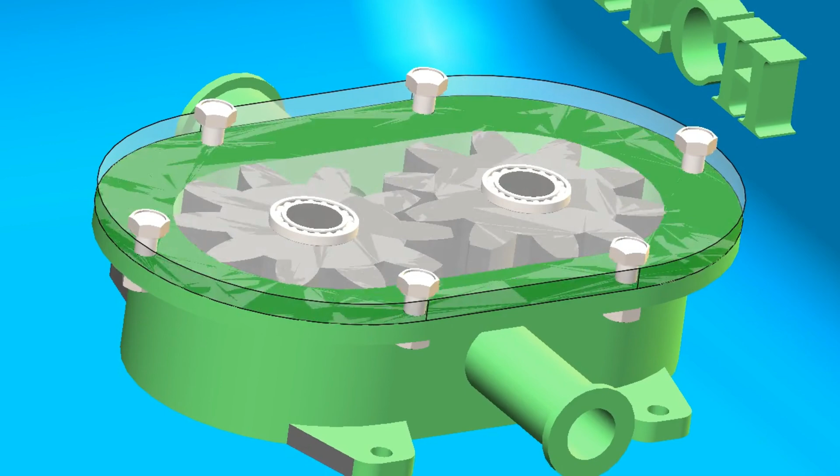What is an external gear pump? An external gear pump is a type of positive displacement pump that moves fluids by trapping them between rotating gears and the pump casing. Its simple design consists of two gears: the driving gear connected to a motor and a driven gear which mesh together within a housing.

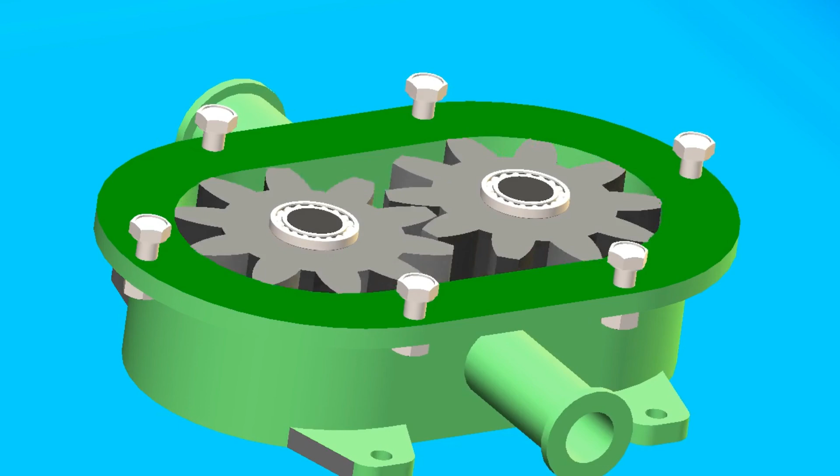As the gears rotate, they create a vacuum at the inlet side, drawing fluid into the pump chamber. The fluid is then carried around the gears and forced out through the discharge port. Known for their efficiency, reliability, and versatility, external gear pumps are used in hydraulic systems, lubrication systems, fuel transfer, and chemical processing, among others.

How does an external gear pump work? External gear pumps work on the principle of positive displacement, meaning they deliver a fixed amount of fluid for each revolution of the gears. Here's a more detailed explanation of how they work. External gear pumps consist of two gears, a driving gear, connected to the motor, and a driven gear. These gears have precise teeth that mesh together and rotate within a close-fitting housing or casing.

As the gears rotate, they create a low-pressure area at the inlet side of the pump. This low pressure causes fluid to be drawn into the pump chamber from the fluid reservoir or inlet port. As the gears continue to rotate, the fluid is carried around the outer periphery of the gears. The fluid is trapped between the gear teeth and the pump casing, preventing it from flowing back to the inlet side. As the gears rotate further, the trapped fluid is carried to the discharge side of the pump.

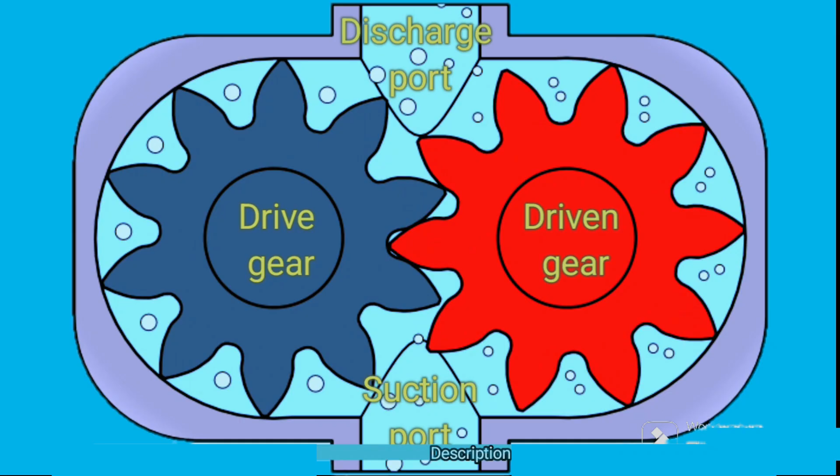The decreasing volume between the gear teeth and the casing forces the fluid out of the pump through the discharge port. This process repeats with each revolution of the gears, delivering a consistent flow of fluid. The flow rate can be controlled by adjusting the speed of the motor driving the pump or by changing the size of the gears. External gear pumps rely on tight clearances between the gears and the pump casing to minimize internal leakage.

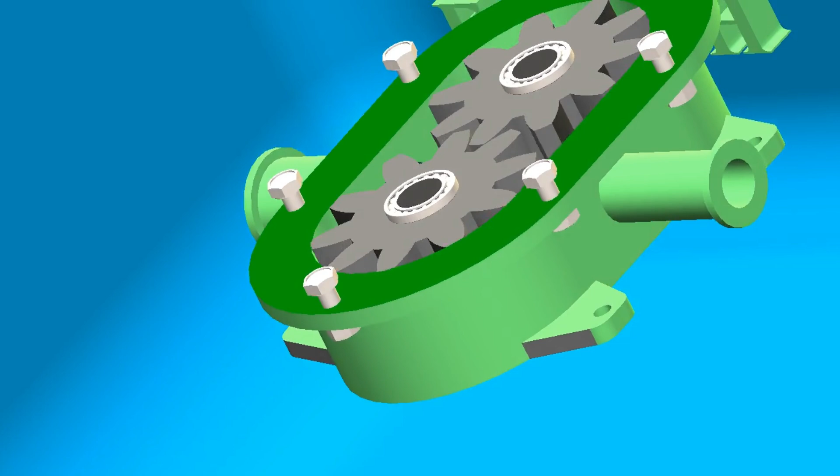Seals are also used to prevent fluid from leaking out of the pump and to maintain pressure within the system. External gear pumps are used in a wide range of applications where precise fluid delivery is required, such as hydraulic systems, lubrication systems, fuel transfer, and chemical processing.

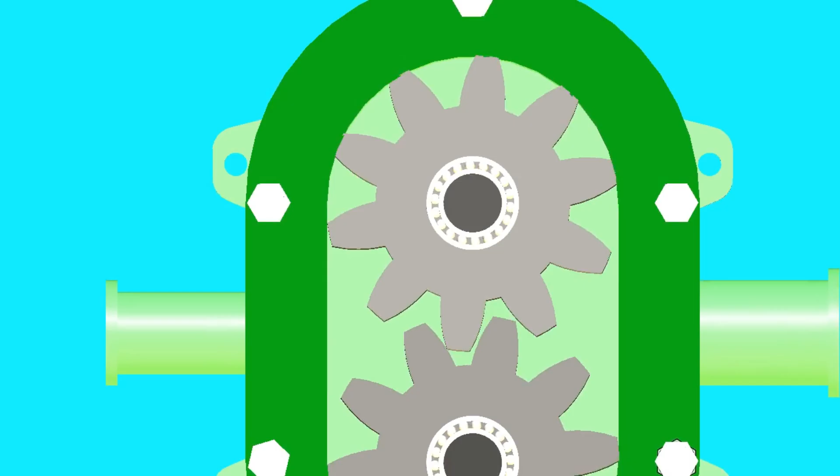Main components of an external gear pump. The main components of an external gear pump include: driving gear, also known as the input gear. This gear is typically connected to the motor or another source of mechanical power. The driving gear transfers rotational motion to the driven gear.

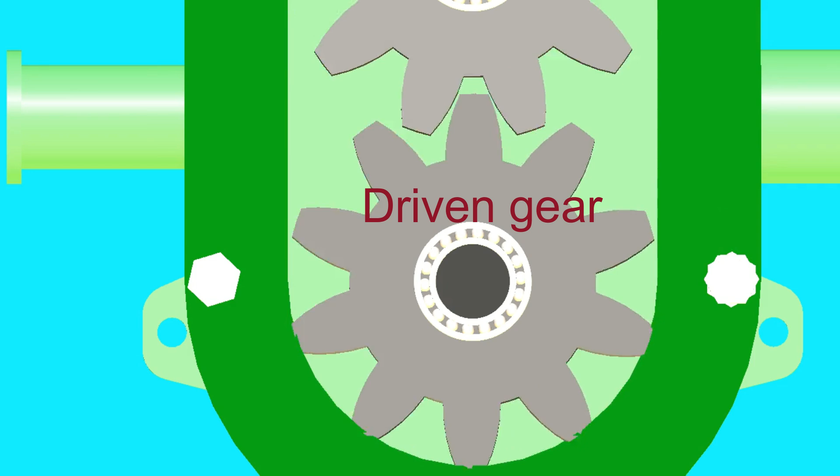Driven gear, also called the output gear. It meshes with the driving gear and rotates as a result of the driving gear's motion. The driven gear transfers the rotational motion to the fluid being pumped. Pump casing. The pump casing, or housing, encloses the gears and provides a chamber for the fluid to be pumped. It also contains the suction and discharge ports for fluid entry and discharge.

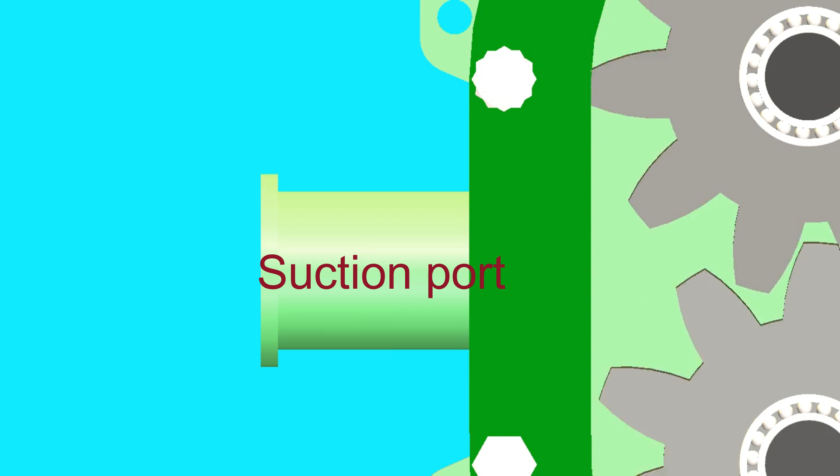Suction port. This is the point where fluid enters the pump. It is typically located on one side of the pump casing and allows fluid to be drawn into the pump chamber as the gears rotate. Discharge port. This is the point where fluid exits the pump. It is located on the opposite side of the pump casing and allows the pumped fluid to be discharged from the pump.

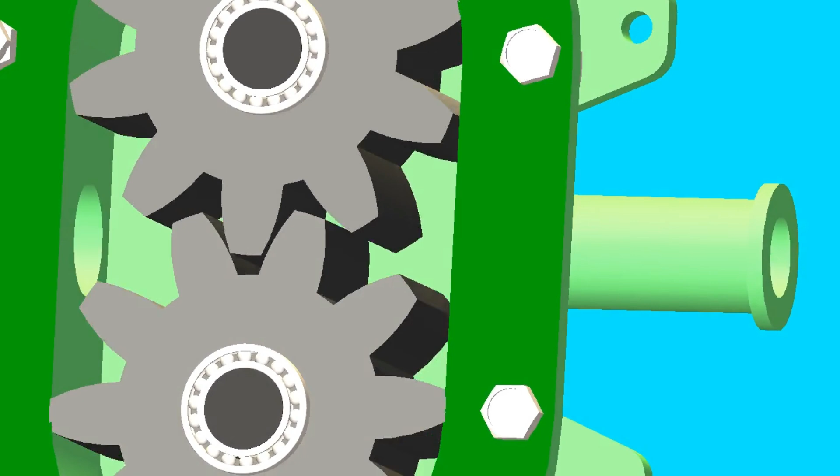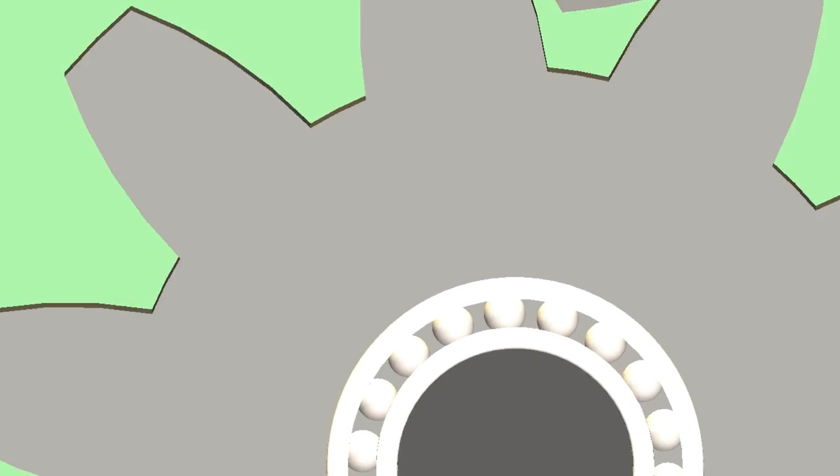Bearings. Bearings support the gears and allow them to rotate smoothly within the pump casing. They help reduce friction and wear, contributing to the pump's efficiency and longevity. Shafts. Shafts connect the gears to the driving source, such as a motor, and transmit rotational motion from the driving gear to the driven gear.

Advantages of external gear pump. External gear pumps offer several advantages that make them suitable for various applications. Simple design. External gear pumps have a straightforward design with relatively few moving parts, making them easy to understand, operate, and maintain. High efficiency. They are known for their high efficiency due to minimal internal leakage and tight clearances between the gears and the pump casing. This results in less energy loss and greater overall efficiency.

Positive displacement. External gear pumps provide a constant flow rate for each revolution of the gears, making them ideal for applications requiring precise fluid delivery. Wide range of fluid compatibility. They can handle a wide range of fluids, including viscous liquids, corrosive chemicals, and abrasive slurries, making them versatile for various industrial and commercial applications.

Self-priming capability. External gear pumps can often self-prime, meaning they can evacuate air from the suction line and start pumping fluid without the need for external priming devices. Compact size. They typically have a compact footprint compared to other types of pumps with similar flow rates, making them suitable for installations where space is limited.

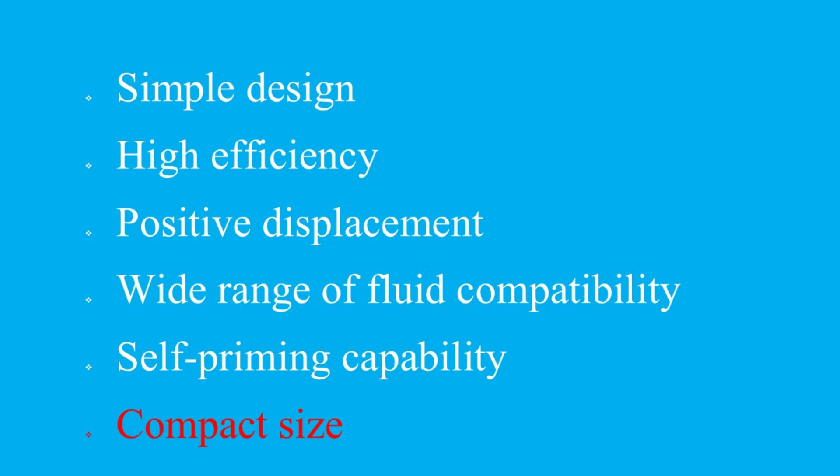Disadvantages of external gear pump. While external gear pumps offer numerous advantages, they also have some limitations and disadvantages. Limited high-pressure capability. External gear pumps are generally not suitable for high-pressure applications compared to other types of pumps like piston pumps or multi-stage centrifugal pumps. They may experience performance limitations or require additional equipment for boosting pressure.

Limited suction lift. External gear pumps may have limitations in terms of suction lift capabilities, especially with viscous fluids. This can restrict their suitability for certain applications where a high suction lift is required. Risk of cavitation. In some operating conditions, external gear pumps may be susceptible to cavitation, which can lead to decreased pump efficiency, increased noise, and potential damage to pump components.

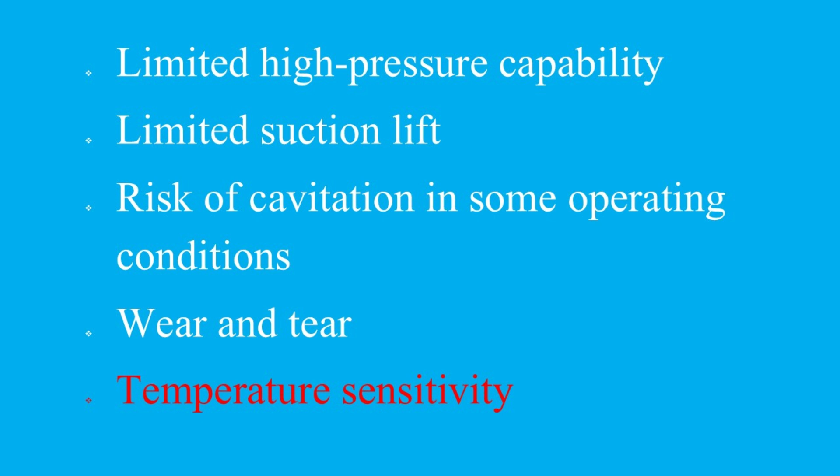Wear and tear. The close tolerances between the gears and the pump casing can lead to wear over time, especially when pumping abrasive fluids or under high-pressure conditions. Regular maintenance is essential to address wear and prevent pump failure. Temperature sensitivity. External gear pumps may not be suitable for pumping fluids at extreme temperatures, as high temperatures can affect the viscosity of the pumped fluid and potentially damage pump components.